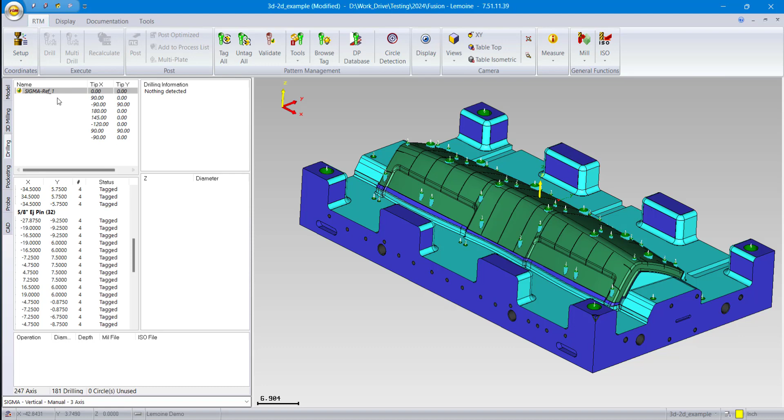I need to do a setup to tell it what orientation the block is in, so I can move the block back and forth. If I need to turn it around for the machine or turn it sideways, whatever I need, if I want to flip it up on one of its sides, I can stand it on end or put it on its back, however I'd like to do it. In this case, we'll keep things pretty simple, I'll just leave it as it came.

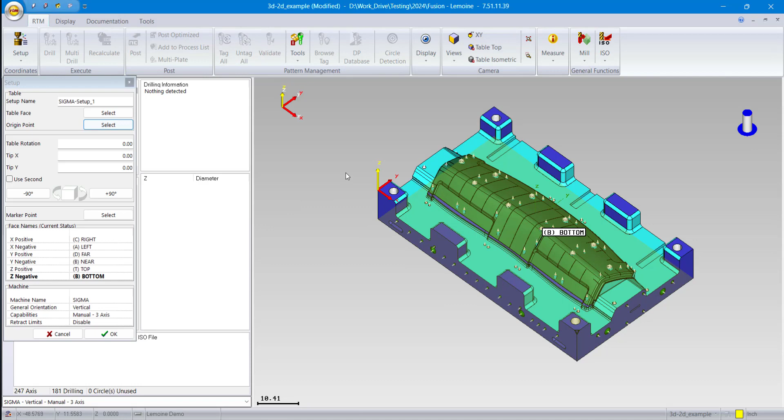I'd like to change my origin point, so I'll put my XYZ zero up in the corner. Everything else looks okay. And what you'll see is, as soon as I do that, each one of the holes now actually has all the operations and tooling required to be able to drill this.

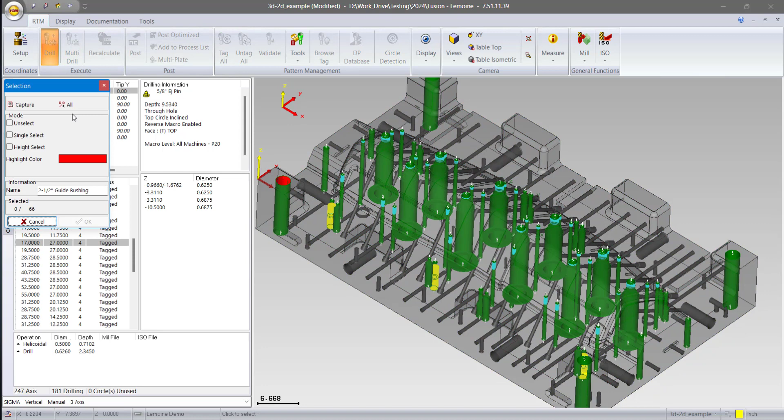Rather than monkey around with this a little bit, I think I'll just tell it to drill it. If I say drill all, what it'll do is, from the top, show me all the different types of holes that it sees. You'll see that some of them say the name of the pattern that it found, and some say the name of the pattern with a bracket of REV, which tells us that some of the stuff we're doing needs to be machined from both sides, as I previously mentioned.

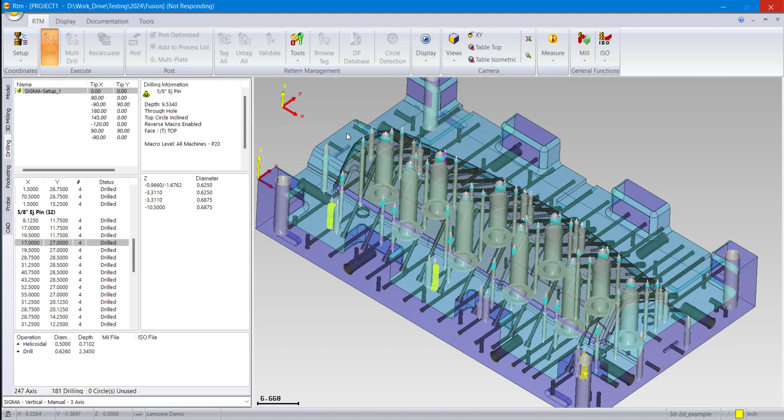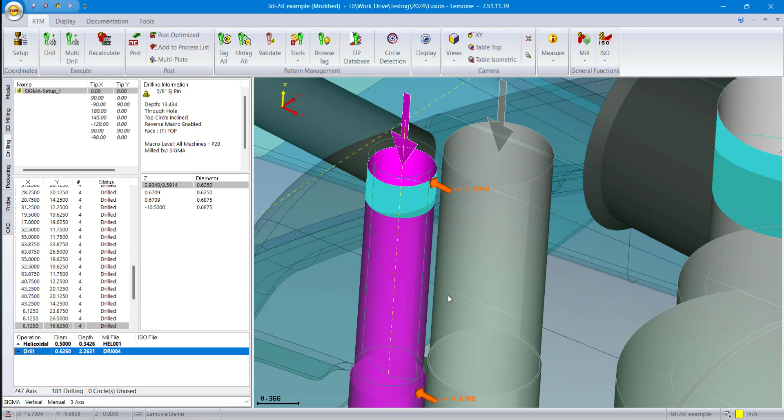It's just creating the tool paths right now, so that'll take a second for this side of the job. If we have a look, you can see on the guide bushings it went ahead and did the first drilling, the second drilling where it couldn't reach, and then put a chamfer around the top. For any of these ejector pins, it automatically helicaled down from the top until it got to a flat spot, because we need a flat spot to be able to drill it. So here we have the helical, and here we have the drill from the top to make sure we have an accurate location, and we'll do the clearance of the ejector pins from the back.

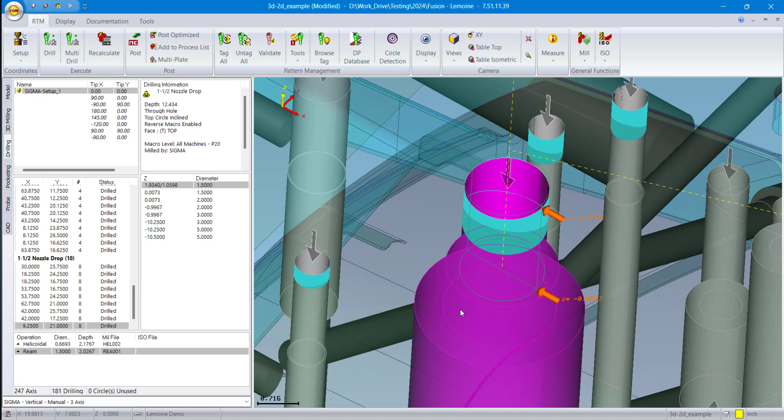Same thing with the nozzle drops. Here we did a kind of a ream size with the helical to put it into position, followed by the reaming. So there's the reamer that goes in behind it to make sure everything is there. We have tip compensation for everything, so I can make sure the helical goes deep enough that the reamer doesn't hit it. There's all kinds of controls that I have over top of that.

To do some more with this, I'd like to just pop my panel back out here a little bit, and I'm going to make a process list. We're going to call this guy setup 1, and maybe I'll put dash sigma, which is the name of the machine, so that I know what I can do, because this will track through several different machines to accomplish what we want.

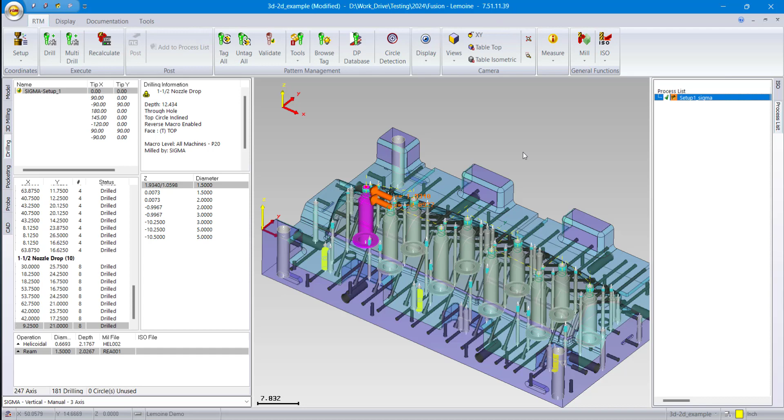I can take all of the programs from this side. If I want to simulate some of them, I can do that. I can pick one and tell it to simulate. We'll just take this guy and click on simulate, and you'll see that everything is automatically optimized for rapids. It'll go through all of the nozzle drops with this particular program, and move its way through and do what it needs to do.

Once you've determined that a sequence is correct for a certain type of pattern, and it's been tested out on the machines and everything's proven out, it will do all the automatic depth detection, so we don't have to worry about the depth. It will warn us if the tooling is too short. There's all kinds of collision detection inside the system to make sure we don't collide. We have another check to make sure we don't violate any of the surface data of the model. Everything is checked and checked and checked to make sure everything is as it should be.